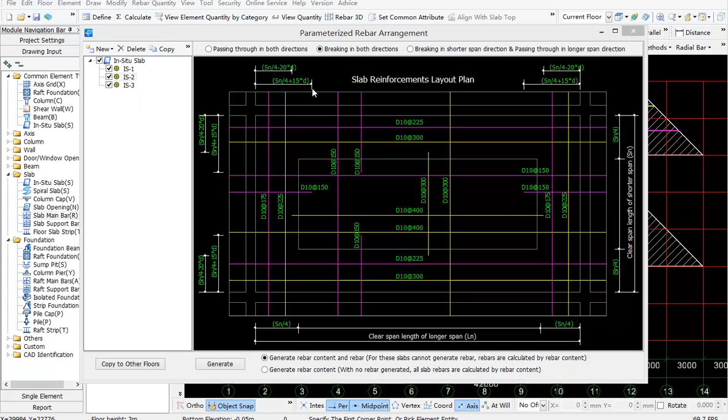Rebar content. Among the three types of rebar arrangements in parameterized rebar arrangement, the second and the third can only generate rebars in rectangular slabs, so it is necessary that we provide a new method for these special shaped slabs: calculate by rebar content. Select parameterized rebar arrangement, then you can see there are two generating modes: generate rebar and rebar content, and generate rebar content.

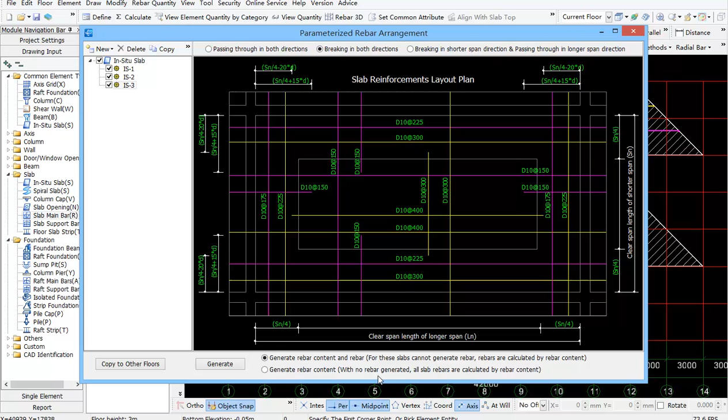If you choose generate rebar content and rebar, the first type of rebar arrangement will be applied to all slabs, while the other two will only be generated in rectangular slabs. At the same time, there will be rebar content calculated by the slab rebar arrangement. As you can see, there are rebar content and rebar information in the slab attributes.

Rebar content per unit volume is calculated based on the rebar arrangement, and you can input it manually. Rebar information specifies the rebar type, which also can be input manually. In case of different rebar types, you can use a slash to separate them.

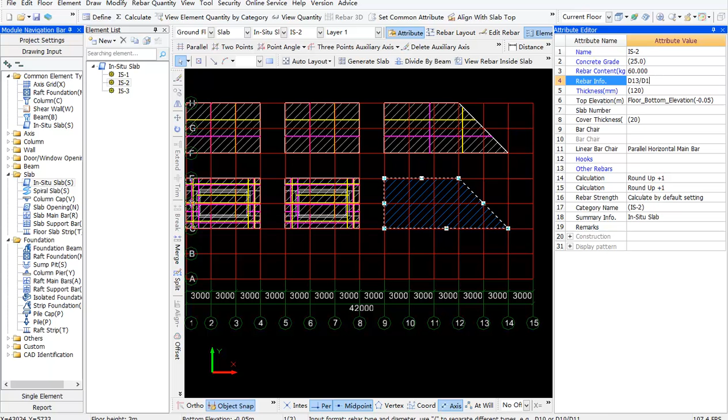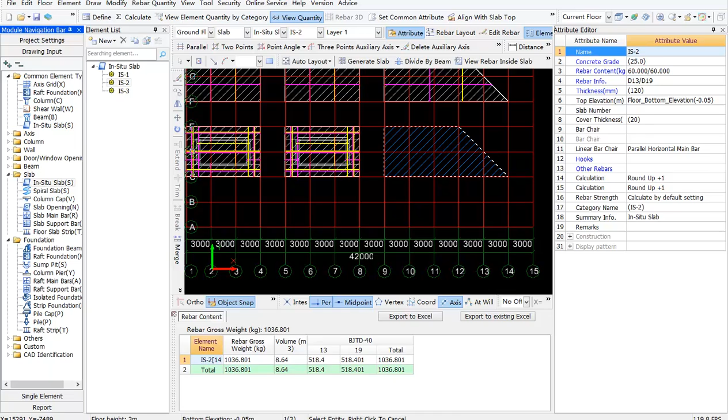As you can see the results, volume of slab is 8.64, rebar content is 60/60, the total rebar weight for D13 and D19 are both 518.4. Therefore, when you use generate rebar content and rebar to arrange slab reinforcements, there will be both rebar and rebar content generated. For these slabs where no rebars can be generated, they will be calculated by the corresponding rebar contents.

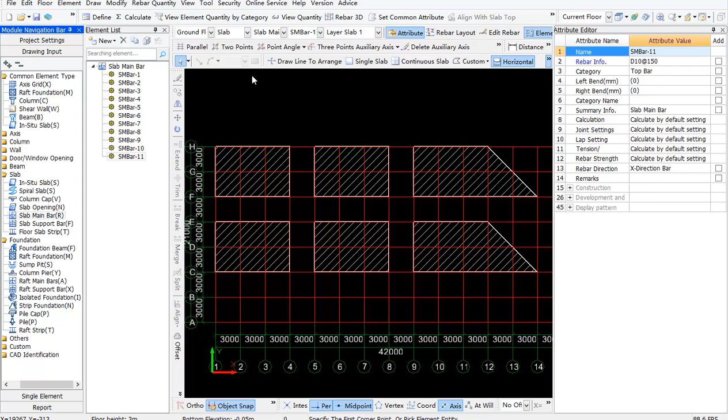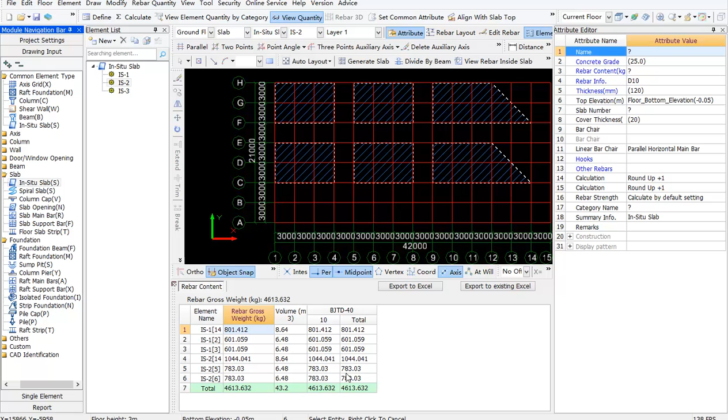As for generate rebar content, there will be only rebar content generated in the slab attributes, and the rebars will be calculated by rebar content. The above is how TRB calculates rebar quantities by rebar content, and it is also applicable to rafts.